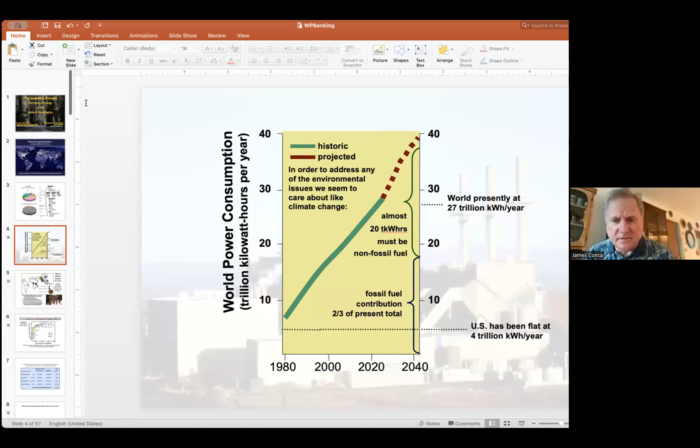That's what the fighting's been about. It's always been about what it always will be about. Right now, humanity produces 27 trillion kilowatt hours of generation every year, but we are going to be going up to at least 40 trillion kilowatt hours a year by mid-century. When people talk about decarbonization, they forget that the actual pie is growing, because they only think about the percentage—we want to be 50% this and 20% that—but the actual numbers are growing dramatically.

If we look at the distribution of energy production in the world, it splits into two parts: power, which we'll focus on, and transportation. Right now they're not very linked, but they really need to be, because transportation is completely dominated by petroleum. If we're going to use other energy sources for transportation, like electricity or hydrogen, you're going to have to change the power distribution as well.

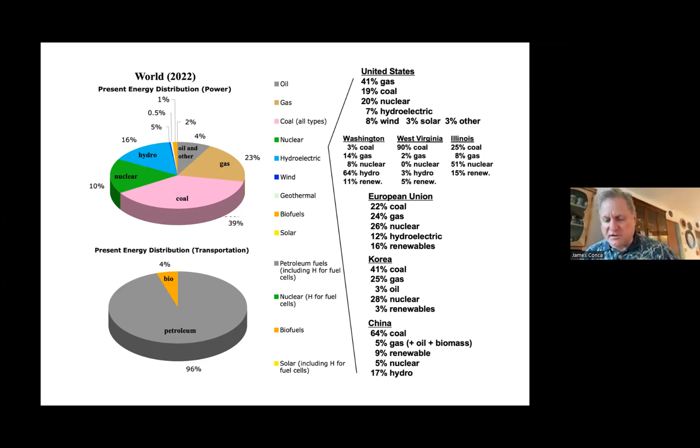So this is the world power consumption growth curve. It's rather steep, has nothing to do with the United States. We're flat, we have been for the last two decades. The world is presently at 27 trillion kilowatt hours a year. And the big question is: is it going to keep going up and up? Is it going to turn over at some point?

So we'll talk about 40 trillion kilowatt hours as a good place to arrive at. But if you get up to that number, you're going to need 20 trillion kilowatt hours of non-fossil fuel just to keep fossil fuel where it is, not to roll it back. Now, 20 trillion kilowatt hours is more than fossil fuel produces today. So not only do you have to come up with something to replace all the fossil fuel produced today, but you have to come up with twice that in order to meet the growth curve.

So this is where the numbers matter. Percentages, people talk about percentages, but you need to talk about production. You need to know about what is actually produced, not a percent of what is produced or percent of what could be produced or those kind of things. You actually need the numbers, and the numbers matter.

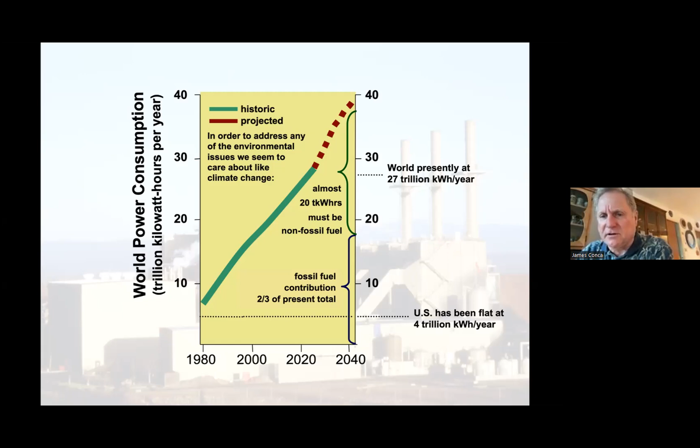And you might say, well, forget it, we have ours, we care about the climate. We don't, but that's kind of nasty because it turns out it takes about 3,000 kilowatt hours per person per year to lift someone up out of poverty. So if you want to eradicate global poverty, which who can argue with that, and its evil stepchildren, war and terrorism, you have to come up with about 40 trillion kilowatt hours.

This is called the Human Development Index. I encourage you to Google it, United Nations Human Development Index. Basically, it shows, and this has been known for a while, that the equation of happiness is dominated by access to energy. Doesn't matter whether you were a 17th century nobleman making 3,000 kilowatt hours per person per year off the backs of 10 slaves, 10 servants, 4 oxen and 4 horses - it's a great calculation for the student - or everyone listening here, who's getting about 10,000 kilowatt hours off the backs of mainly hydro with a little bit of other. So it doesn't matter, you need about 3,000 kilowatt hours per person per year to have what we call a good life.

Now, let me explain the numbers here. The Human Development Index goes from 0 to 1, where 1 is absolute happiness and 0 is absolute hell. So if you look at the way the countries of the world line up by per capita use of energy, most of the world is below 0.8 and half of it's below 0.6.

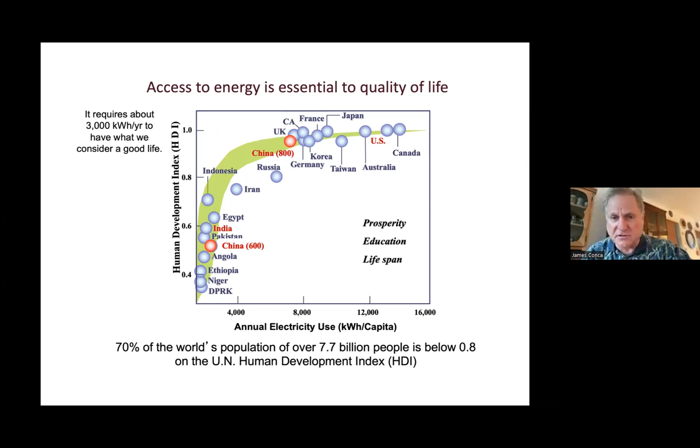Now, there is a sweet spot. If you can get everyone down to about 4 to 6,000, get everyone up to about 4 to 6,000, this is as sustainable and ethical as you can get.

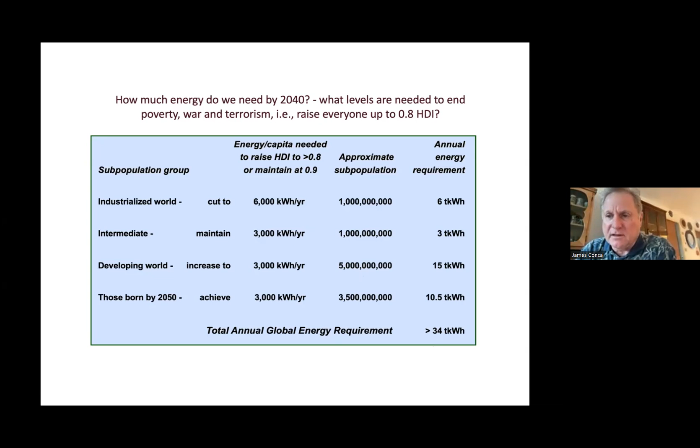And how much energy is that going to require? Well, there's us in the industrialized world, cut us down to 6,000 kicking and screaming, but there's only 1 billion people in that subgroup. Same thing with people at 3,000, keep them there. The developing world and those coming on board, that's where we have the huge requirement for energy, because you're talking about over 8 billion people that you have to get up to 3,000 kilowatt hours per year. And that is a lot. So it'll take at least 34 trillion kilowatt hours, and that's only if it's evenly and equitably distributed, which never happens. So we're talking about over 40 trillion to actually get anywhere near close to eradicating global poverty.

So what are the fastest growing energy sources in the world? If we were in a room, I'd call for hands and people shout out. What do you think the fastest growing energy sources in the world are? I want to invite people. You can also put it in the chat if you want to, if you don't want to shout out.

Okay, so it's petroleum, it's oil. That's the fastest growing energy source in the world. And the next is coal, and the next is natural gas. Now, renewables are coming up, but they're so low that it'll take a very long time to reach anywhere near what those are, because the fossil fuels are still growing. This is not stagnant. They're still growing because of all those other people in the world that need it. So if you're going to get rid of these three, you have to bring up these three. We don't have the luxury of saying, oh, we don't like nuclear, we don't like wind, we don't like whatever. No, there's a time and place for everything, and you need them all because there's not that many alternatives to fossil fuel. And fossil fuels are so dominant, and they're continuing to grow.

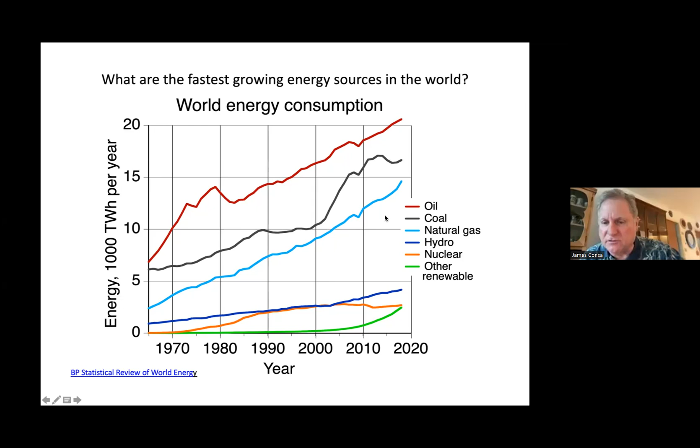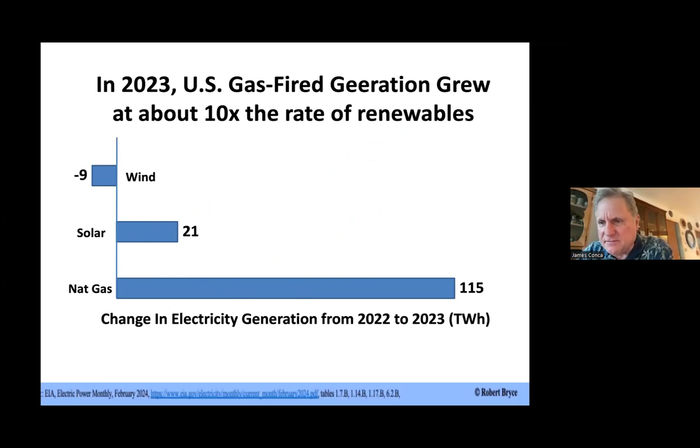Now, this cuts off at close to 2020, but if you look at last year, gas-fired generation in the United States grew 115 terawatt hours. And solar only grew 21, and wind lost 9. So again, at this rate, solar and wind will not even catch up to natural gas, let alone petroleum or coal. So again, we're not moving fast enough, and fossil fuels are moving very fast still.

Now, in Washington State, again, we're great, wonderful. We've done some wonderful things. In fact, the biggest emitter is transportation. That's the lowest hanging fruit, and it's the biggest emitter.

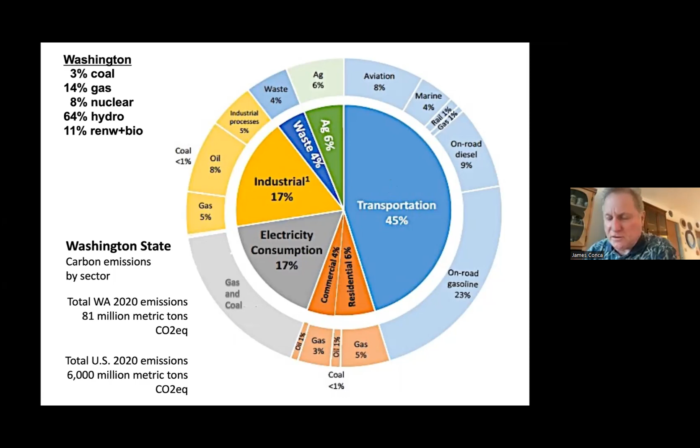Once we close the last coal plant in the state of Washington next year, at Centralia, this will drop dramatically from 17% down to probably about 10%. But again, we don't produce much emissions anyway compared to the United States as a whole. We've done very good at reducing emissions from agriculture, waste, industrial, commercial, and residential buildings. We've done really good at cutting those down. It's simply transportation that we haven't even touched. We don't have enough electric cars yet to make much of a difference.

Now, the thing about the Pacific Northwest is that we're facing a significant power generation shortfall. Right now, we have a 7 gigawatt shortfall, which we can make up by being clever and moving things around, a little shell game kind of stuff, but we are short a significant amount of energy. And 7 gigawatts is about twice the output of Grand Coulee Dam, so this is not a trivial amount of energy. When we get to about 2030, that capacity need is going to grow to about 10 gigawatts.

Now, this was recently highlighted in the last couple of years where we had warm enough summers that we were one Snake River Dam away from rolling blackouts, according to the Bonneville Power Administration. And for similar reasons, Texas and California have had rolling blackouts during extreme weather, both heat and cold.

So let me back up a bit. The coal-fired power plant retirements in the Pacific Northwest are going great guns. I mean, that's great, we have closed half of our coal plants, and here was the plan, and these are all closed. Again, Centralia number 2 is going to close next year, and then these others will close too.

So that's 6 gigawatts that are retiring out of coal, and then another 6 gigawatts or 6,000 megawatts are scheduled in Utah in the next few years. So we're losing a ton of coal-fired power, and we're not replacing it with anything except a little bit of wind.

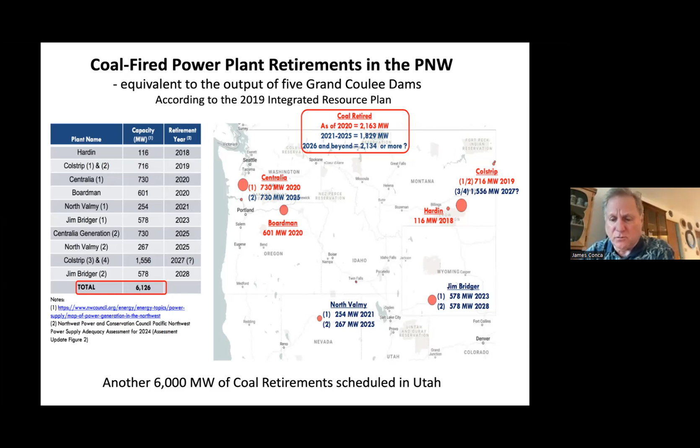Now, the Northwest Power Pool, which is the agglomeration of all power producers and operators, warned in 2019 that we would face a 26% probability of an outage or blackouts beginning in 2025, when we close our last coal plant, along with many neighboring states, and population's increasing for the first time in 20 years, and we have large increases in electric vehicles.

So what happened is that we went from less than 5% risk of outages, which is very nice—that's why we never have rolling blackouts across the whole Pacific Northwest—but it's going up to about 26%.

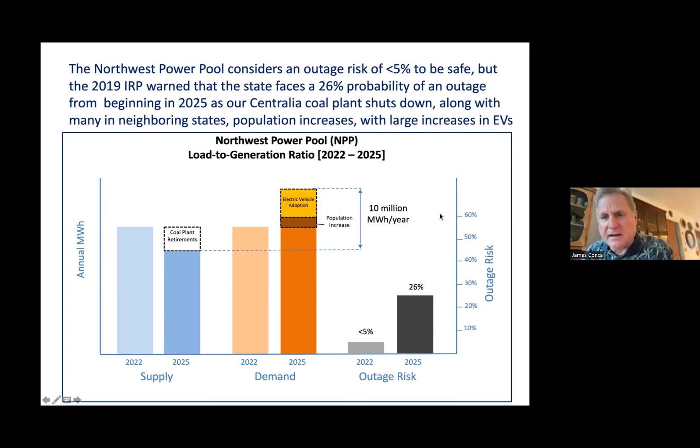Now, the state legislature got really mad at that and said, hey, tone it down, we don't want everyone to be upset or anything. So they said, okay, well, we'll postpone or defer some of these coal closings, and we'll start up a couple of natural gas plants. But all that does is replace the risk of blackouts with the likelihood of failing to reach our carbon goals.

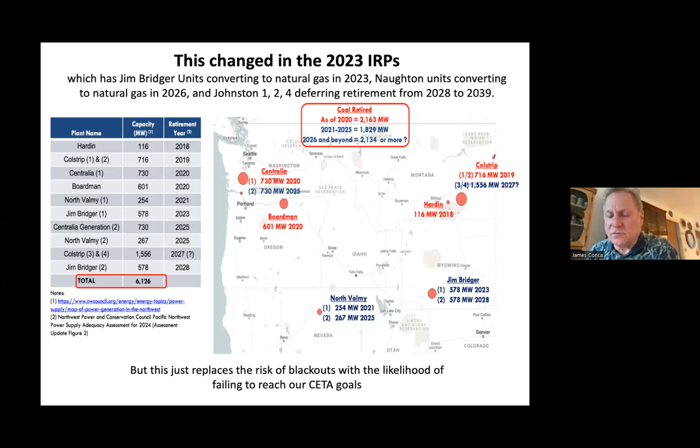So again, it's kind of tough. This is a tough balance if you don't have the right mix and you keep closing a bunch of old coal, which I like to close, but you can't just throw away 10 to 12 gigawatts of electricity generation without replacing it.

All right, so let's go back. Why do we care about this? Well, we care about this because of CO2 and climate change and a whole bunch of other things. And of course, all of these on the right side produce a lot of CO2 per gigawatt hour of electricity produced, and all of these on the left produce very little.

Now, it really doesn't matter relative, although nuclear is the least emissive, and this includes mining and enriching of uranium, mining for steel, production of photovoltaic cells, things like that. So this is the entire life cycle, and this is the newest data from the United Nations Intergovernmental Panel on Climate Change. So yeah, but again, all of these are good, all of these are bad.

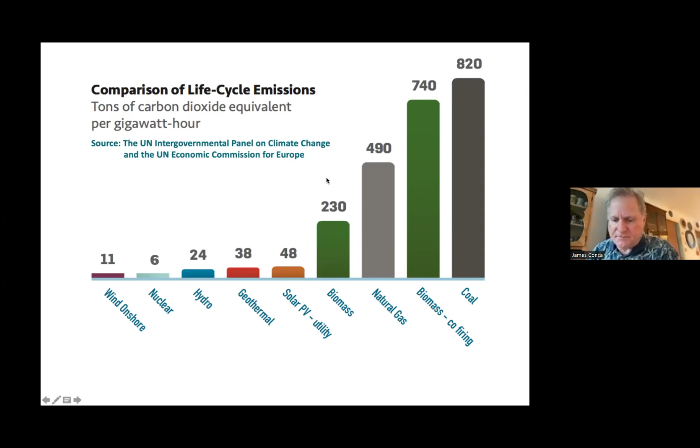The reason we have these problems occurring in the Pacific Northwest is because electricity has to simultaneously be produced, delivered, and consumed within a minute. These have to be balanced. If you produce more than you consume, you start blowing transformers and starting fires. If you consume more than you produce, you start having rolling blackouts. So this has to be balanced minute to minute.

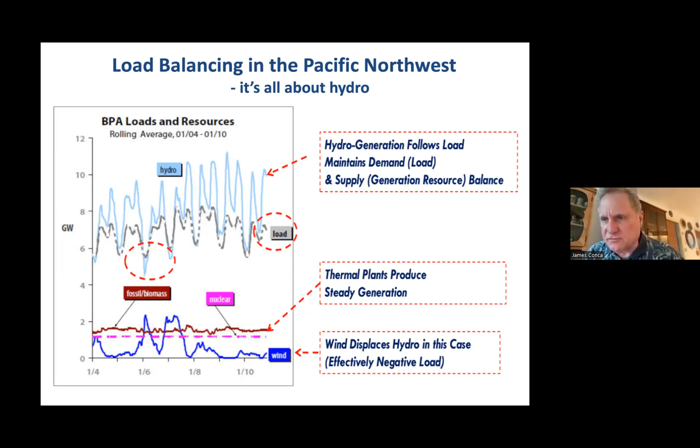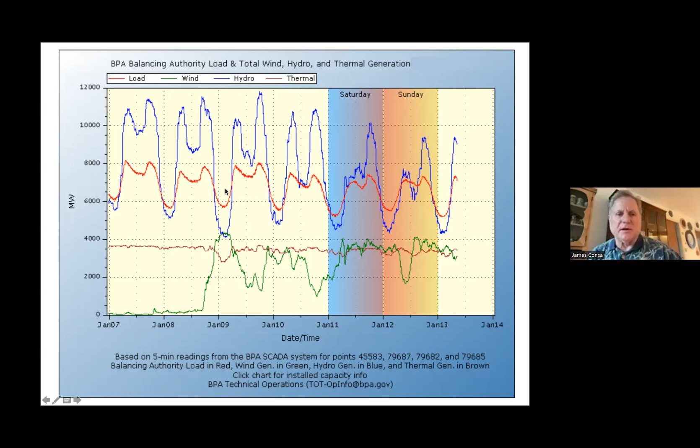So here is another one, the same kind of thing. Wind is green, hydro is dark blue, and the load is red. So here, no wind, and then suddenly, boom, wind comes up, and hydro has to drop below. You just have to dump it.

So capacity factor, what this gets around, what is really caused by this is something called the capacity factor. The capacity factor is the annual average percent of the maximum output possible. So if you have a 1,000 megawatt nuclear reactor, you're going to get 935 megawatts out of that 1,000 megawatt reactor on average. These are national averages. Nuclear just runs all the time, it only has to stop every couple of years to refuel for a month.

Now, natural gas is also very good, but it only produces power about 60% of the time. Why? Two reasons: one, it's actually more expensive than you think to run a natural gas plant. Two, sometimes the pipelines cannot deliver enough natural gas to the plants to run them.

Coal is only about 50% of the time because you have to refuel—you have to bring in coal every day, about 10,000 tons of coal per day per coal plant. That's a huge amount. Hydropower is not very high, only 40% of the time it's producing what it should, because we use the water for so many things: transportation, irrigation, flood control, not just producing power. And wind is about 35%, because that's just when the wind blows.

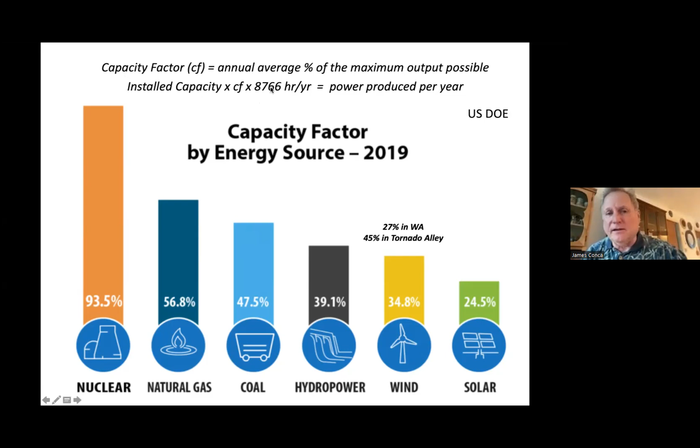So again, the capacity factor equals the annual average percent of the maximum output possible. To find out how much power is produced from a generator—whether it's a nuclear plant, a coal plant, a wind farm, or a solar array—this is all you do: you take the installed capacity, say a 1,000 megawatt wind farm, which is huge, times the capacity factor, say in Washington State 27%, times 8,766 hours a year. That's the amount of power produced. No more, maybe less if there's mechanical issues, but no more than that.

So if you compare nuclear to wind—you build a 1,000 megawatt nuclear power plant, like Energy Northwest near me, or you build a 1,000 megawatt wind farm in the same place—the nuclear power plant is going to produce about 8 million megawatt hours per year, and the wind farm, the same size, is only going to produce a little over 2 million. So when you start comparing costs and investment, you have to compare 4 wind farms, 4,000 megawatts of wind, to 1,000 megawatts of nuclear, because the output is so different.

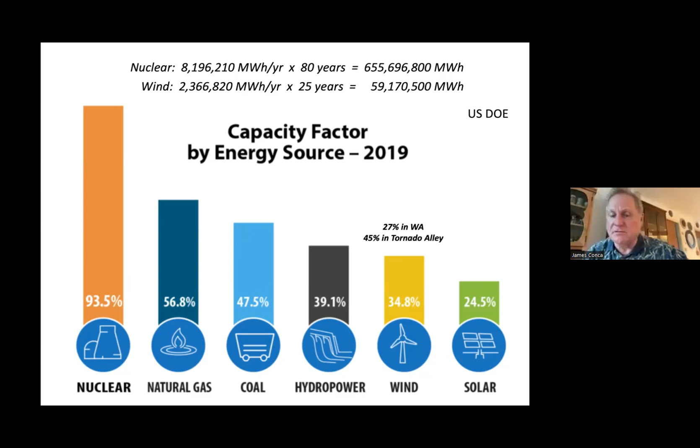And it's worse than that, because the lifetime of a nuclear power plant is 80 years, not 40. That 40-year number was picked out of the air by the Atomic Energy Commission in 1957, but pretty much they all last about 80 years, and most of ours will last 80 years. So over its lifetime, it's going to produce 655 million megawatt hours, and the same size wind farm is going to produce 59 million. So if you are going to compare costs and output, you need to compare one nuclear power plant to 10 wind farms of the same size. If you don't do that, you're not comparing apples to apples. It's incredibly important to do that, and no one does that, of course.

So capacity factor, and then there's something called the effective capability—that means what can you rely on. Washington State has 7,100 megawatts of wind, and the effective capability is only 7%, not even 27% like the capacity factor. That means when you really need it, when it's really hot or really cold, there's only a 7% chance you can get that energy from wind. So you can only guarantee about 500 megawatts of that 7,100 megawatts of wind to be there when you need it.

That is incredibly important and is the real problem here, because we're only building wind that you cannot depend on when you need it, and we're shutting down coal, not just in Washington State but in the surrounding states as well. So you're replacing very reliable base load with completely unreliable renewables. That's the problem. No one ever talks about it, and it's really going to be a big problem.

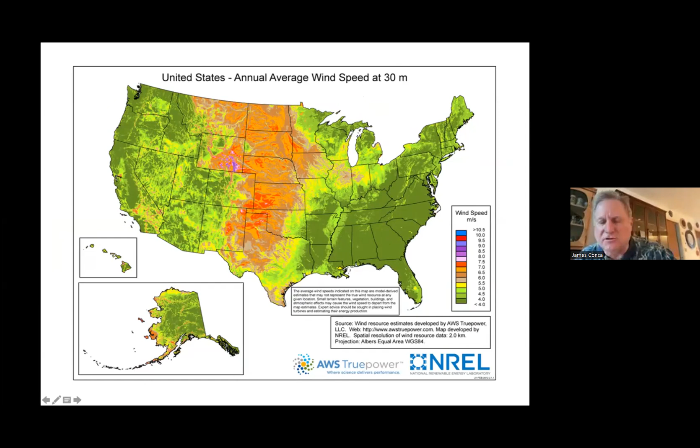It really depends on where you build things. Here's Tornado Alley, a wind resource map of the United States, showing all the big winds. Why would you build wind farms over here in Seattle? They just don't produce anything. And don't build wind farms in Georgia. You build wind farms here, and then you use high voltage transmission lines to get it to where you need it. That's how you do it.

Same thing with solar. You don't build solar in Maine. You don't build solar in Seattle. Now, over here where I am, it's okay, but you want to build solar in the Southwest. That's where you get all of the energy from.

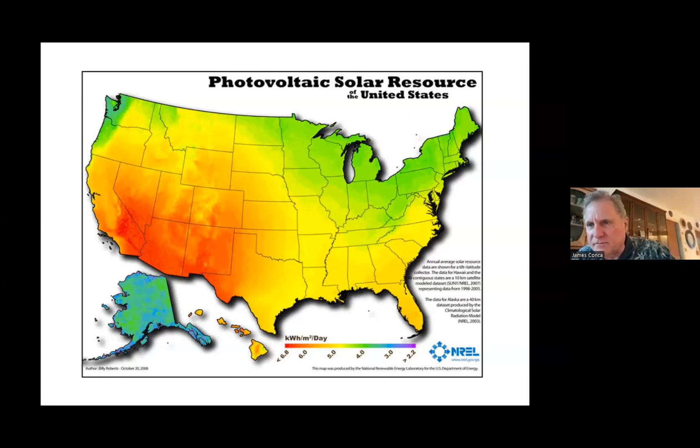Now, it matters where you put power plants because of the materials it takes to build them. This is the mass of steel in million metric tons and the mass of concrete in million metric tons to build a megawatt of each of these sources. If you look at wind, it takes an awful lot of steel and concrete to build a megawatt of wind, and about half that for solar. Hydro is a lot of concrete, but not much steel. Coal is about a quarter of wind. And then nuclear and natural gas, it takes almost nothing. One, because nuclear produces so much power, so per ton of steel or concrete, you produce a lot more energy than anything else. And natural gas, because it just doesn't take anything—you can throw up a natural gas plant with almost no steel and concrete.

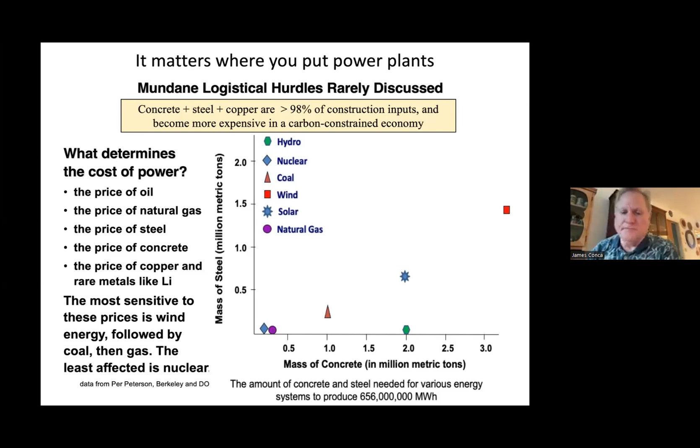And that's why everyone loves natural gas. We have a lot of natural gas. It's relatively cheap, and you could build one in a year. So that's why everyone loves natural gas.

There's a recent report out of Australia that shows the rate limiting step for achieving a decarbonized economy is copper. We talk about lithium and all this other stuff, but it's copper. We don't have enough copper, and I don't see where we ever will have enough. It's going to take about 4.2 billion tons of copper alone by 2050 to achieve a reasonably decarbonized world. Throughout all of human history, we've only mined about 700 million tons. And just business as usual, if we don't decarbonize, we're still going to need another 700 million tons over the next 20 years. We've mined out most of the high-grade ores, and now we're using lower-grade ores, which take a lot more energy and destruction to get out. Of course, the same limits apply to other metals, but copper is the problem.

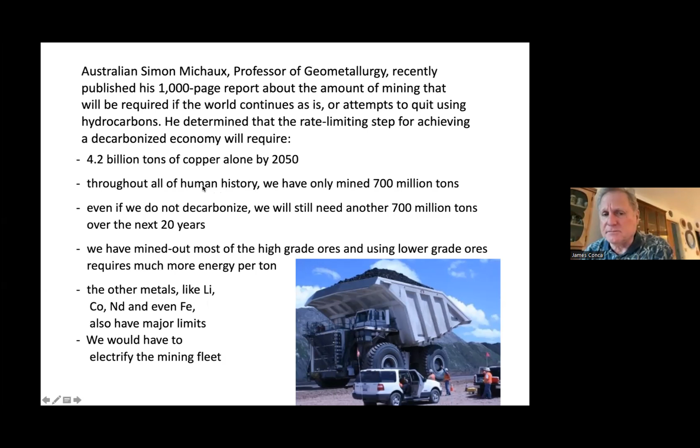So hydro makes the Pacific Northwest energy rich, but wind makes it capacity poor. This is where grid scale storage is desperately needed. People talk about batteries, but batteries are expensive and not very good, and they require huge amounts of critical metals like we were just discussing. Those same metals are really needed for electric vehicles if we're going to reduce petroleum use in the transportation sector. You're going to need all of these metals for that, let alone for energy storage.

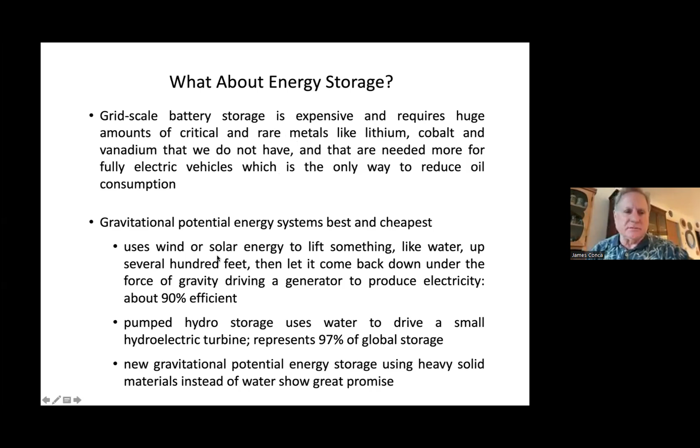You have a generator midstream, and during times when the wind farms and solar arrays are producing energy, you use that energy to pump water up to the upper reservoir. You increase the gravitational potential energy. Then when you need it, when the wind stops blowing or the sun stops shining, you let it out and it runs through a hydro generator, just like a hydro dam, and you get 90% of that energy back. It's as efficient as lithium batteries and an awful lot cheaper.

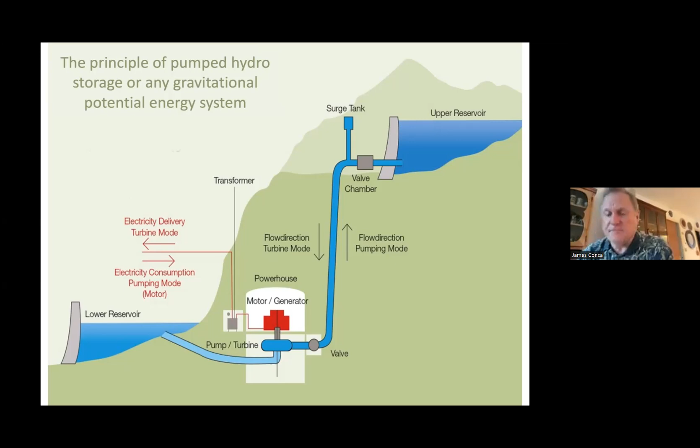And pumped hydro is 98% of the energy storage in the world — it's pumped hydro, not batteries. So if we want to make the 7,100 megawatts of wind in the Pacific Northwest useful, we need to build several pumped hydro systems along the Columbia. And that's easy, not very difficult. The problem is no one wants it in their backyard, just like anything else.

Now, if you talk to the leading climate scientists, whether it's Jim Hansen, Kerry Emanuel on down, they all say there's no credible path to climate stabilization that does not include a lot of nuclear. And that's mimicked in the Intergovernmental Panel on Climate Change from the UN. No one who knows these systems disagrees that we can't do this without nuclear energy. There's a bunch of people out there that hate nuclear, and those are more political and historic issues, having to do with ignorance more than anything else. But anyone who knows these systems knows you can't do this without nuclear, just can't.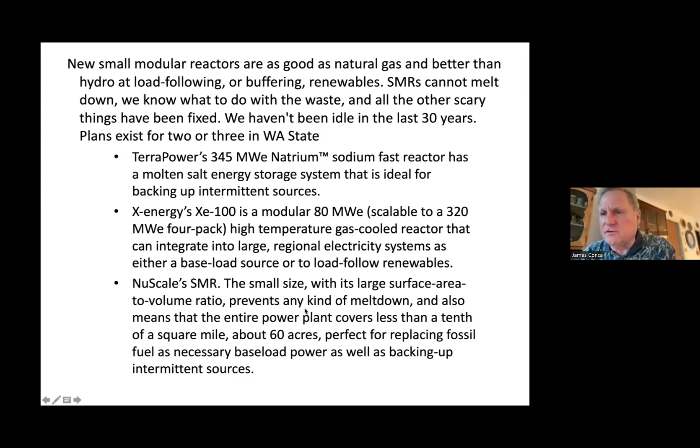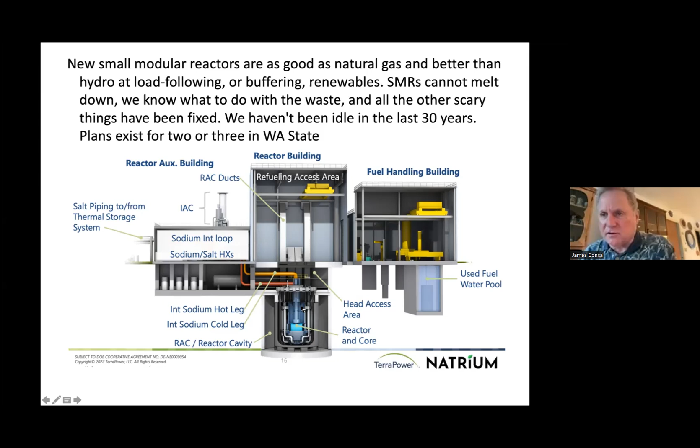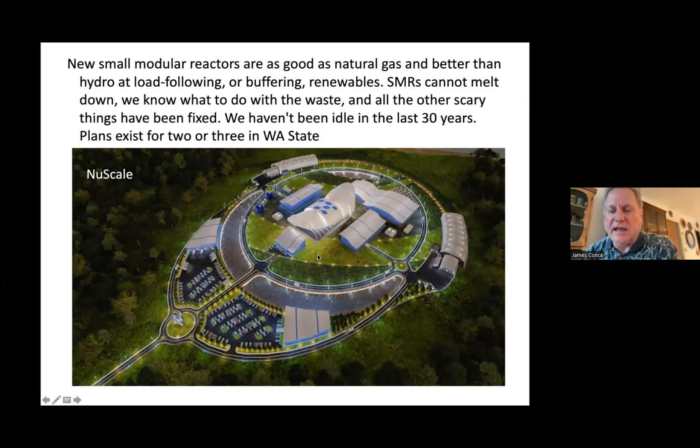So this is what Bill Gates's looks like — I don't want to get too much into it. Also, these new ones have the reactor core actually underground, which is, I don't know why we didn't do that before, it's actually a brilliant idea. This is the pebble bed of X-Energy — the pebbles are the fuel, made out of materials that cannot melt down. Then here's NuScale's reactor. The site boundary is about 60 acres, and that's it — that's the safety zone, not the 50-mile diameter that present reactors have as their safety zone.

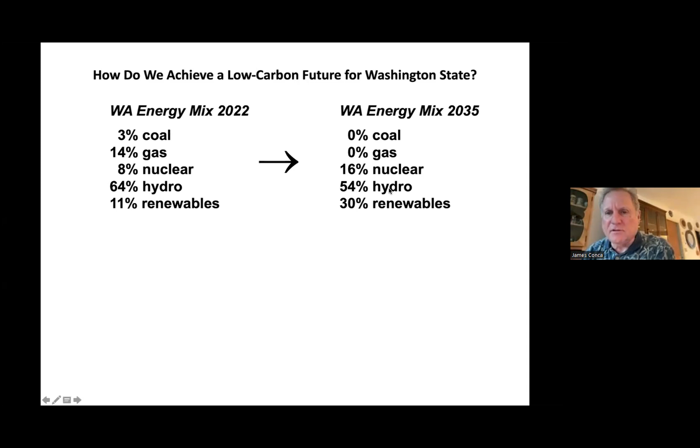So how do we achieve a low carbon future in Washington State? Well, this is what it would look like, something like this. All you have to do is build one decent sized SMR bunch, a reactor set of 12 modules, and you could double nuclear in this state. Hydro is going to go down — we may lose the Snake River dams, which I think would be terrible from an energy standpoint and a climate standpoint, but that's a whole other issue. It'll go down anyway because the total amount of energy generated is going to be going up, and hydro can't go up, it can only go down a little bit. We can triple the amount of renewables, but only if we have a decent amount of grid scale storage.

So in 2022, we generated 92 terawatt hours. We have almost no grid scale storage, and we have only about 100,000 electric vehicles. Now, if we want to be like we say we want to be, low carbon by 2035, or decarbonize completely, we're going to need at least 115 terawatt hours compared to 92.

If we have about 15 pumped hydro systems or grid scale storage of about this size, and we have over 2.5 million EVs that themselves are going to need about 7 terawatt hours to charge each year, then we can do this. Now, that's a lot of EVs.

The problem is if you don't build a lot of EVs, you can't replace the internal combustion engines and you won't make a dent in petroleum. Right now, there's about 5 million internal combustion engines in the state of Washington, and by 2035 there'll most likely be about 8 million. So we've got to get way over 1 million EVs in order to make a dent in petroleum.

I'm getting to the end of my time here.

So in America, this low carbon plan is going to be something like this. It doesn't have to be exact, but something like this: 500,000 new megawatts of wind in the right place, 200,000 megawatts of new nuclear, 300,000 megawatts of new solar in the right place, and 120,000 new megawatts of hydro. Don't even have to build a single new dam. This is going to cost about $9 trillion, of which $4 trillion is capital.

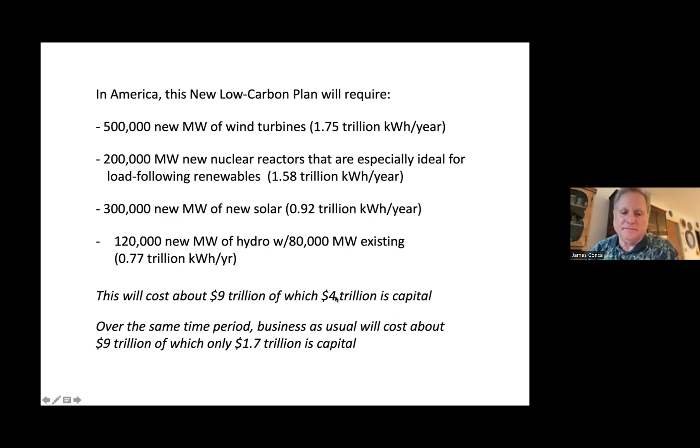Well, let me back up a little bit here. For Washington State to achieve this mix is going to cost about $200 billion, of which $100 billion is capital investment. Now, that sounds like a lot, but again, over this time period, that's not much. It's just that you have to come up with the $100 billion in capital first. And that may be where Washingtonians for Public Banking comes into play.

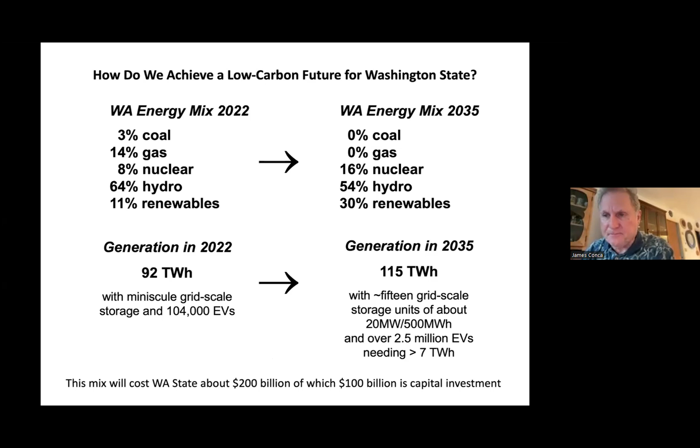All right, I've kind of gone through the time. I'm going to keep going.

Yes, if you could wrap up a little bit so we could still have time for questions and answers. Or about that time. Good, good. Yeah.

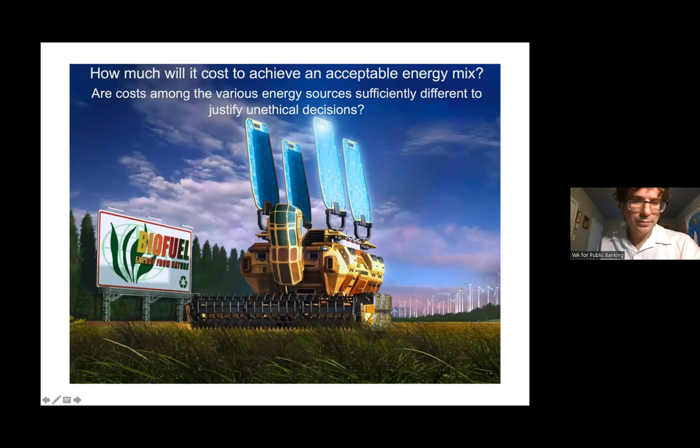All right, let's see. Okay, so how much is it going to cost? And keep in mind, are the costs amongst the different energy sources sufficiently different to justify unethical decisions? I mean, I know this is America, we're going to make a buck, I get that. But do you have to make so many bucks that you're actually being unethical about things? Is there enough of a difference in the cost to justify this? Because if it was only about cost, we'd be a natural gas nation, no question. We have enough natural gas for the next 500 years, we're not peaking anytime soon. So, obviously, cost is not the only thing we care about.

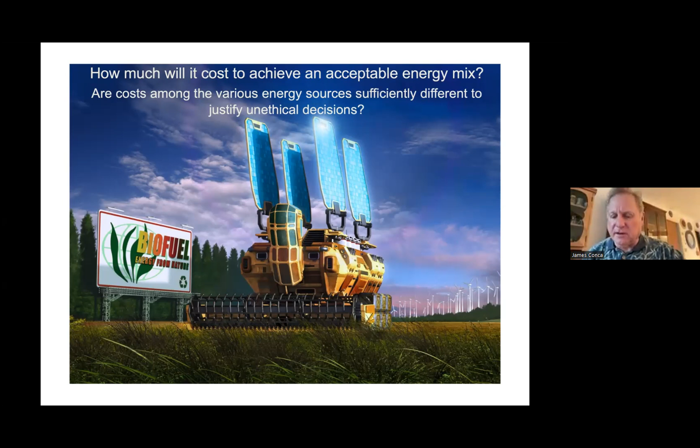So right now it is the cheapest energy has ever been in world history. And so if you're going to make these major changes, now is actually a good time to make them, because it's not going to remain cheap.

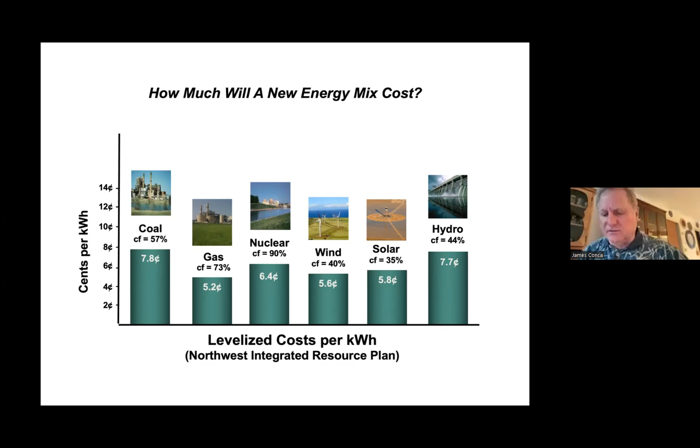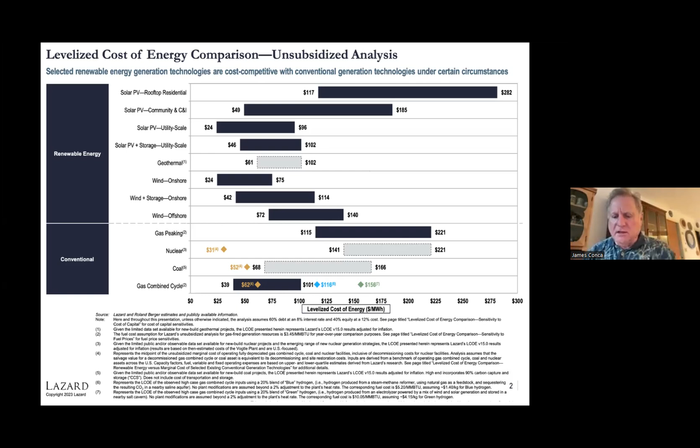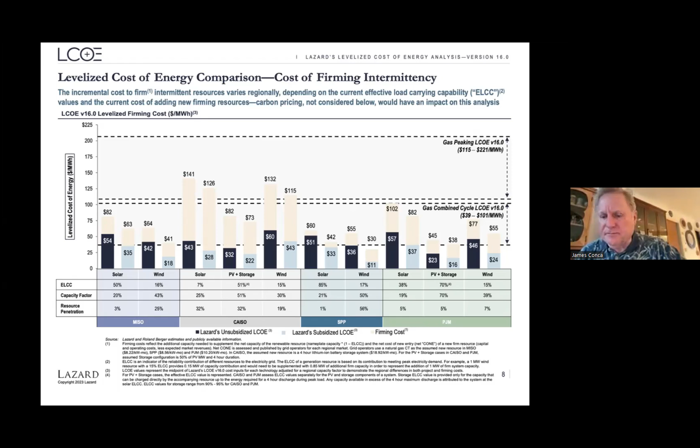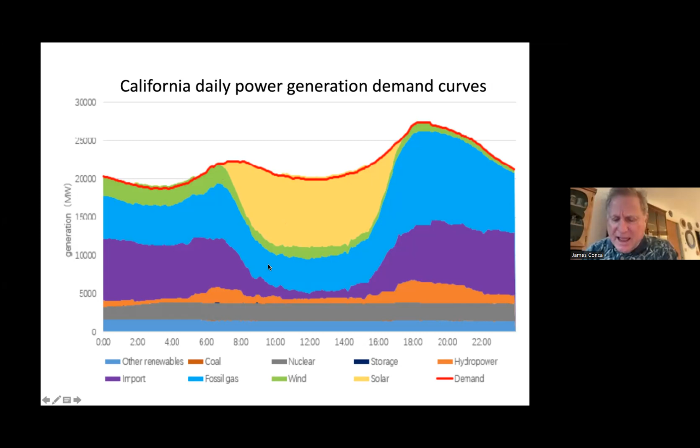But gas has to ramp up when the sun goes down, and it has to ramp down when the sun comes up. So what happens is you have a dozen or so what are called peaker plants - gas plants that you can turn on and off like a light switch - and they generally idle all the time until the sun goes down, and then boom, they come on. They only work for several hours a day and idle the rest of the time.

Now, who pays for idling a gas plant? They're not cheap - you basically have to pay them not to produce energy. So we're back to the old stuff with the farmers. And again, the average capacity factor of one of these peaker plants is only 2.6%. So it's only producing about 2% of the energy it could produce if it were running all the time. And it could run all the time - it's just used to back up solar.

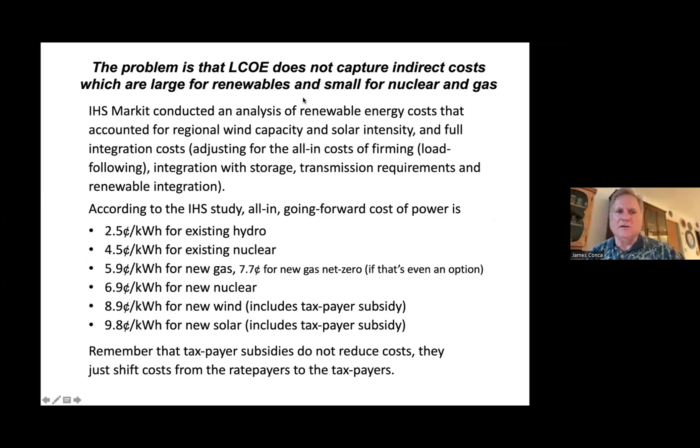So that's why those indirect costs were so high. So if you look at indirect costs as well as direct costs, and factor that all in, as IHS Markit did a few years ago, then the cheapest electricity is existing hydro. Existing hydro is the absolute cheapest energy source there is. So the idea of closing down hydro dams should be thought through really, really carefully, because it's the cheapest energy we have.

Existing nuclear is 4.5 cents - the second most cost effective. You don't shut down nuclear power plants if they're perfectly good and safe and they've been having their license renewed for the next 20 years, which we keep doing in America. We have shut down a huge number of very good nuclear plants. There's only 2 that actually should have been shut down, and the other 14 are just wonderful.

Why did you shut them down? It was purely politics.

New gas is 5.9 cents per kilowatt hour, or if you think we'll ever get to net zero, which is dubious, then it's going to go up to 7.7 cents. New nuclear is 6.9 cents, and new wind and new solar are 8.9 and 9.8. These are the most expensive things, and that includes a taxpayer subsidy.

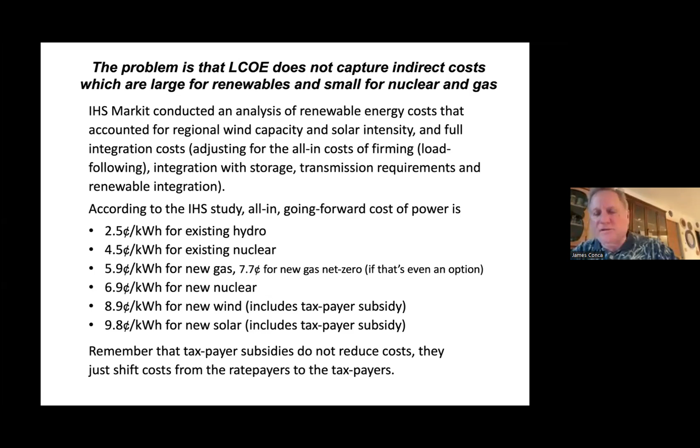You have to remember that taxpayer subsidies don't reduce the cost. They simply shift the cost from the ratepayers to the taxpayers. And since we don't know where our tax dollars go anyway, it kind of gets lost in the shuffle. But someone's paying for it. We are paying for it at some point.

Regulation, regulation, regulation. I love regulations. I hate deregulation because all it does is allow certain companies, banks, or whatever else to just gouge and do what they want. And we saw that in Texas a couple of years ago when it got really, really cold and everything collapsed, and 170 people died and it cost $3 billion in damage.

And the ratepayers were told to pay an extra $1,000 to fix that. And it's like, what? So I like the regulations in the Pacific Northwest. They're still good. We basically have public utility districts across the Pacific Northwest that are wonderful.

All right. Any questions?

I have some safety stuff here if you wanted to see. This is the mortality rate from each energy source.

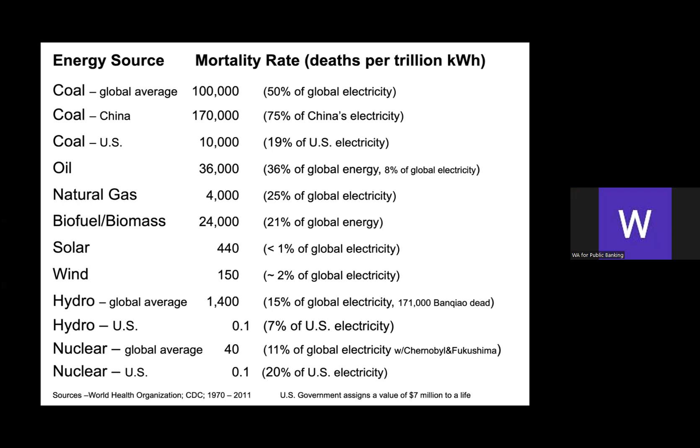Dr. Conca, the state does have a few programs to try to promote clean energy—we have a revolving loan fund dedicated to clean energy, a few things. How optimistic are you about those programs to really move us forward on this issue, to really push fossil fuels off the grid?

It depends on where they're investing. If you're going to build more wind turbines, it's going to be a total waste. Now if you want to make the wind turbines we have effective, like I mentioned, you want to build pumped hydro. So if those funds go to building pumped hydro systems that store the wind energy for when it's needed instead of throwing it away, then that's good. If you use those funds to promote charging stations around the state so people will buy more EVs, that's great.

So the big thing we have to do is produce more electric vehicles, produce more grid-scale storage like pumped hydro, and build more nuclear. And come up with $100 billion in credit, with the capital to do it. It's gonna be tough.